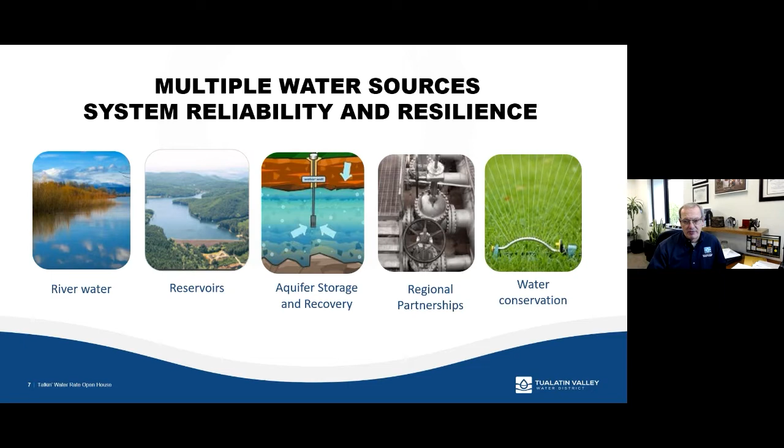So how do we use the ratepayer money that we get, the monthly bills that you pay? What do we do with it? So one of the most significant things that we are currently doing is the construction of the Willamette water supply. You're going to hear that over and over. This has been a multi-decade investment, and it's a big project.

You know, I kind of view this project as we are planting the trees that future generations get to enjoy the shade on. And we had similar people that did that for us, and this is our turn to make this kind of multi-generational investment that looks far into the future and creates a resilient supply for us today and far into the future.

We also spend money on the maintenance and operations of the water system. That's the day-to-day stuff. That's running the pumps that we need to run. It's maintaining the pipes and the valves that we have to do day to day. And when you think about the fact that we have in the neighborhood of about 800 miles of pipe, thousands and thousands of valves in the system, all of that requires maintenance, and we spend money for our staff to maintain that.

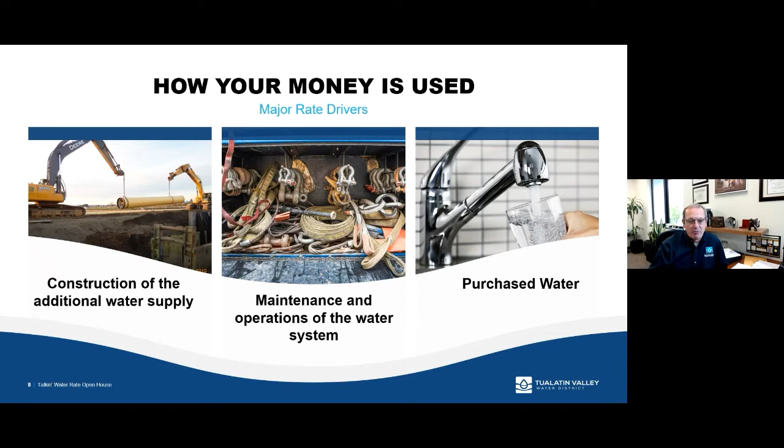And then another significant portion of our budget goes to purchasing bulk water supply, both from Portland and from what I mentioned before, the Joint Water Commission. So we purchase our bulk water supply from those two sources, and that costs us money, and it's where a significant portion of our budget goes to.

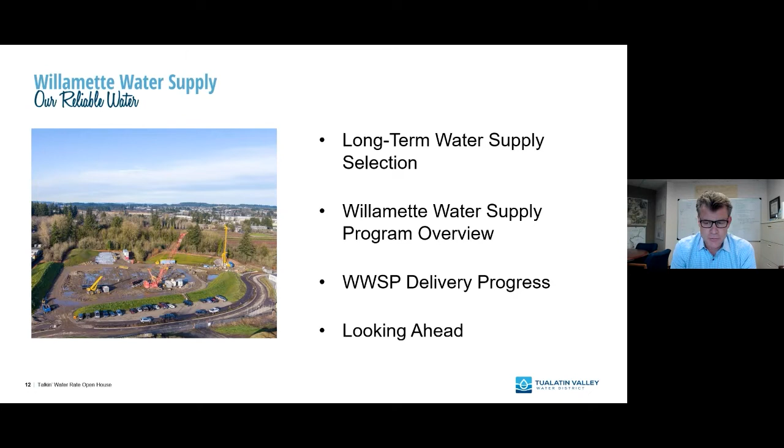So yeah, this is my introduction slide as far as what I do and the priorities, but let's get into the presentation real quick and go into the outline. Four main parts of my presentation: the long-term water supply selection, just how we got to where we are today, the water supply program overview and system overview, the progress we've made, and looking ahead. I'm going to get through my presentation pretty quickly because I want to make sure we get to your questions as soon as we can, and also Paul's got some very important information to present to you on the district finances.

Regarding the long-term water supply selection, this was a decision made back almost 10 years ago, in 2013. TVWD performed an analysis, about a 2-year analysis of the various long-term water supply alternatives available to it. They're indicated here on the right-hand side, starting from the top and going clockwise.

The first option is a new groundwater supply constructed out in Sauvie Island. The second was purchasing water from the City of Portland, which TVWD does now, so it would basically be extending and expanding that supply. The third was the Mid-Willamette River supply, and the fourth is increasing storage at Hagg Lake, expanding supply from the Joint Water Commission.

After detailed technical analysis, financial analysis, environmental impact analysis, and a lot of public input, the Mid-Willamette supply was selected because of lower cost, meaning less impact on rates. It has excellent water quality, provides ownership to the district over its supply, which it does not currently enjoy with the City of Portland. It's also a reliable supply with fewer environmental impacts than all the other options considered.

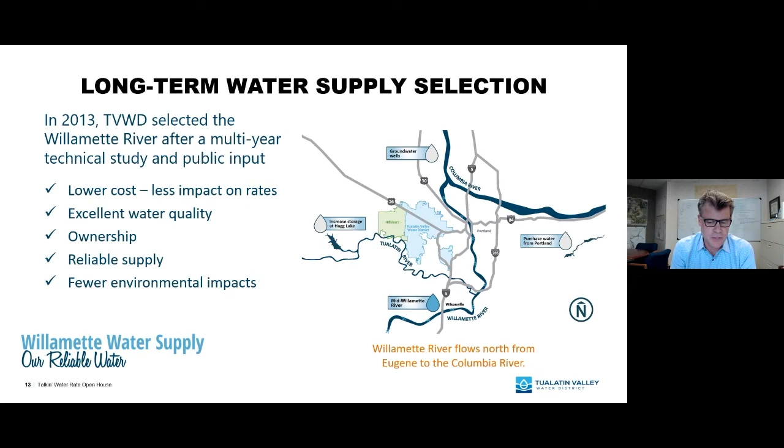I'd like to emphasize that this supply would be replacing the Portland supply. Essentially, the analysis conducted, and I believe it still holds true today, shows that in the long-term costs, the Willamette supply is a lower cost option than staying with the City of Portland.

So what does the system look like at a very high, not very granular, scale? It starts at the south at the Willamette River. There's an existing intake there that we're expanding and improving the seismic resiliency of. We're constructing a new state-of-the-art water treatment plant in Sherwood, more than 30 miles of large diameter transmission main—66-inch welded steel pipe—and water storage tanks. The tanks are planned for the top of Cooper Mountain. There are two of them, but we're only constructing one in this first iteration of the construction effort.

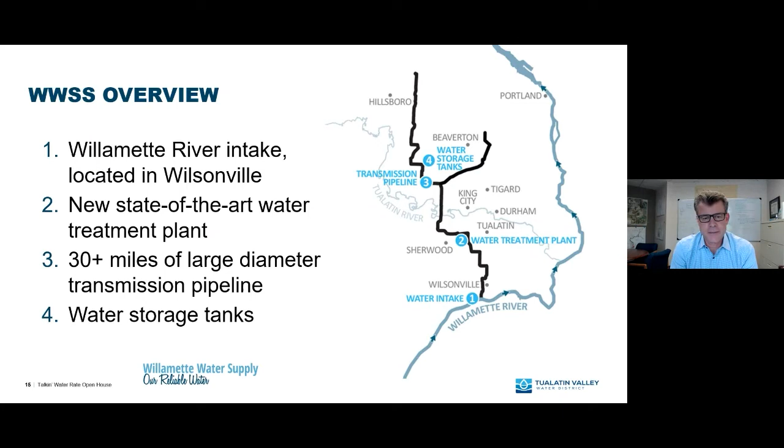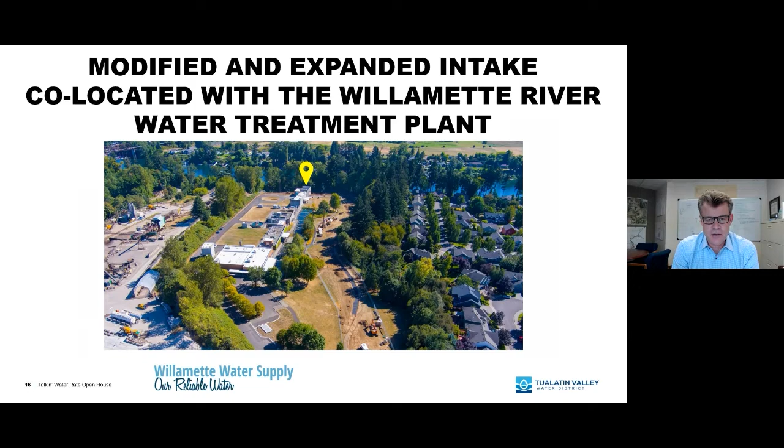I've got some photos to give you a visual image of what each of these elements looks like, starting with an aerial photo of the Willamette River Water Treatment Plant. This is a drone shot looking out towards the Willamette River with the treatment plant in the foreground, down in the city of Wilsonville. The flag marks the raw water pump station, or raw water intake. In the aerial view, you'll see a dashed outline extending into the Willamette River, highlighting where the intake screens are located underwater. There's a pipeline connecting to the raw water facility on the bank of the river—that's where we get the water from.

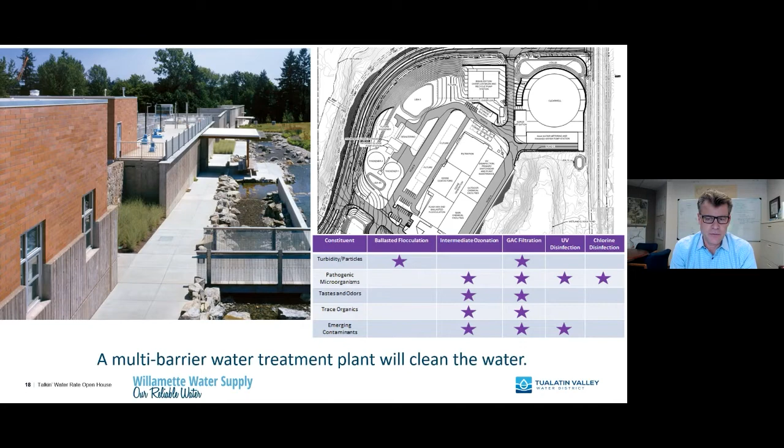A lot of pipeline that we're installing, we have installed. We've completed about 7 pipeline projects to date, of a total of about 18 separate pipeline projects, about 30 miles or more than 30 miles.

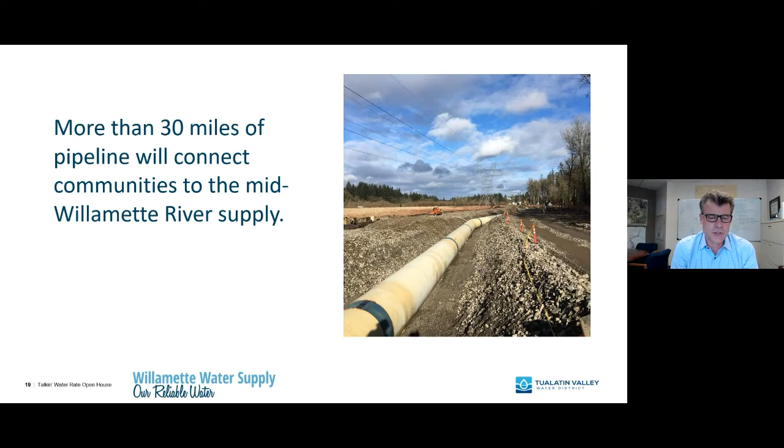And our pipeline projects look something like this. You've probably seen our work. I've got some more photos coming up here in a little bit. And then one more slide to show you what all these elements look like is this one that shows what our reservoirs will look like when they're constructed.

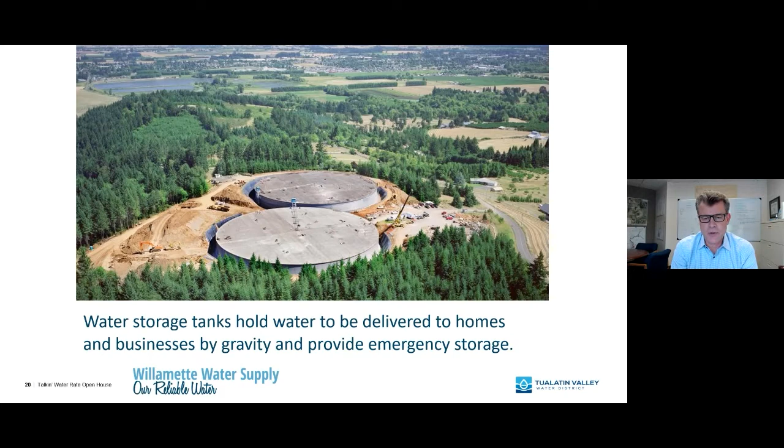Again, we'll only be building one in the first effort. This photo is actually an aerial of the Fernhill Reservoirs, which is part of the Joint Water Commission system out there in Forest Grove. So this is what these tanks will look like, and they hold water to balance our transmission system operations and also to supply water during emergencies or brief shutdowns.

So let's talk about the progress that we've made to date on the Willamette Water Supply Program. To date, we have completed 7 pipeline projects.

We've secured WIFIA loans, which I'll leave for Paul to explain the benefits that provides to the ratepayers. We've received our federal permit for the construction of all of our facilities, completed all of our planning and design for all of our projects. At the end of this year, we'll be advancing all 15 remaining construction projects on the program and continuing our successful partnerships that help us get our work done and also help us manage costs and public impacts on our projects.

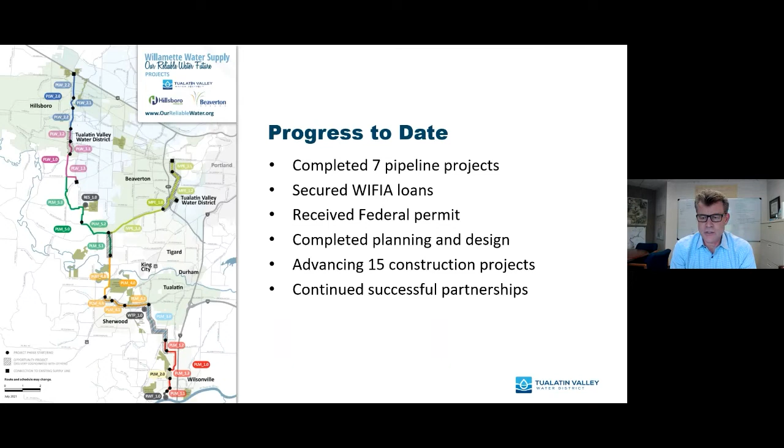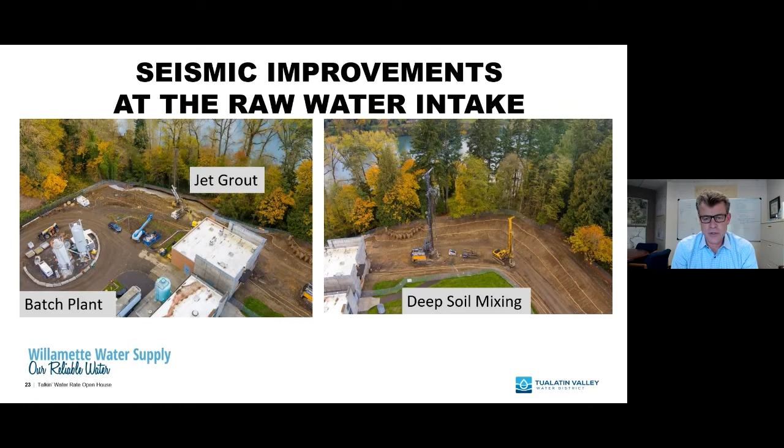But this one in particular, this photo is the pipeline we installed next to Tile Flat Road, where we had to get our pipeline in and out of there and be done with our construction before the development occurred in that South Beaverton area.

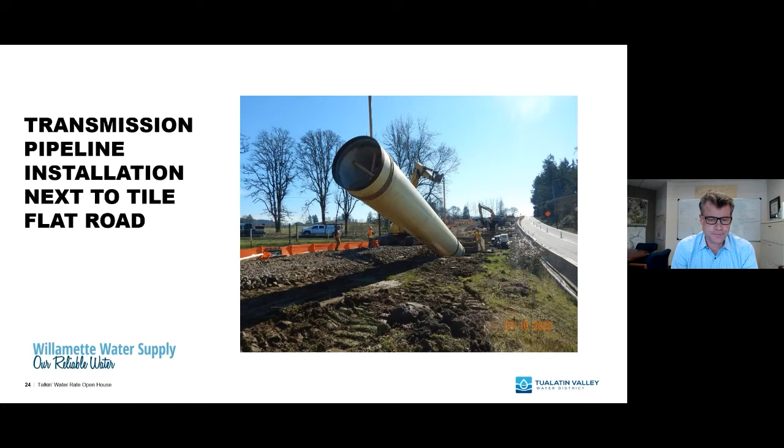We also do a lot of work at night. We're working in some very busy areas. Like right now we're working - sorry, my phone is ringing. I'm gonna press ignore on that.

We're doing work in and around the intersection of Hall Boulevard and Scholls Ferry Road. If you're in that part of town around Washington Square, all of that work is being conducted at night because that area is so busy with traffic. The photo here is actually at 209th and Farmington, where we got permission from Washington County to close that road and get this construction done at night, which was found to be the safest, most economical, and quickest way to do that work with the least impact on the community.

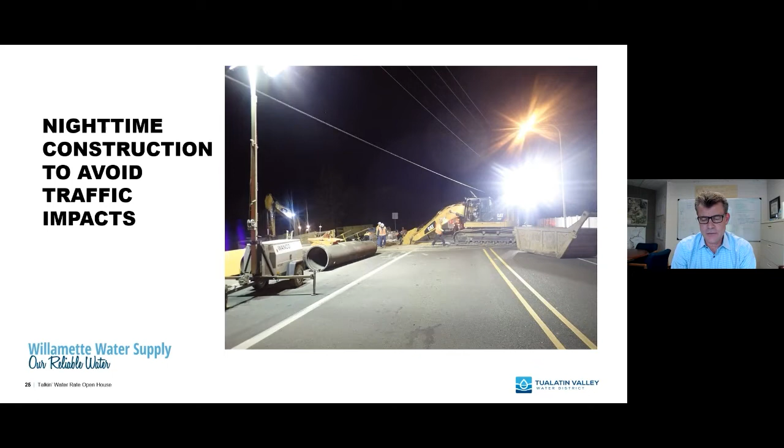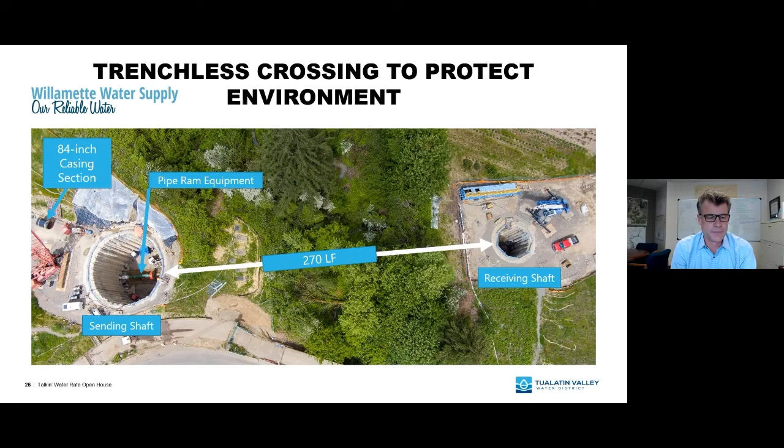One last thing to speak about is what's been the regional economic benefit from the program. So far, 91% of the spend on the program has been to local businesses, material suppliers, goods and services, and that means more than $300 million has stayed local. The balance, about another 4%, has gone to areas outside the local area but still within Washington and Oregon, and about another 5% outside of that area.

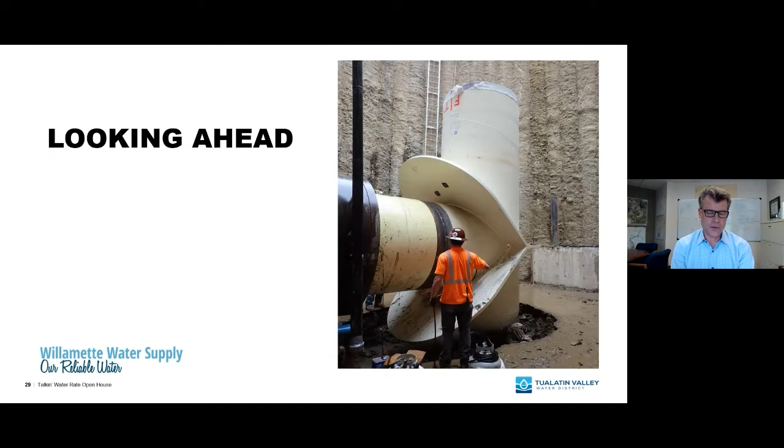Looking ahead to this fiscal year and going forward, we have a lot of work happening. Now that we've completed all of our planning and design, by the end of this year we'll have 15 construction projects all happening simultaneously. It's going to be a very busy period for us from a construction standpoint. We still have a lot of program management to complete, continued acquisitions, some real estate permits and other procurements, and a lot of planning still to be done.

When we're complete with the program, we have to make sure we have water supply integration figured out in terms of delivering this new supply into the existing distribution systems, and along with that, commissioning and startup of the whole water supply system, and planning for long-term operations once the system is operational. We need to make sure we have all of that figured out well in advance of actually turning the system on.

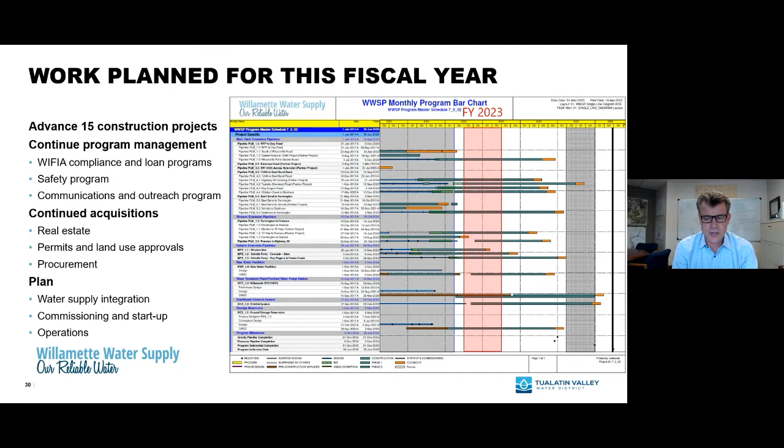Tom already alluded to this, but I want to put a finer point on where these cost increases came from. At the end of last year, end of 2021, we were bidding the remaining work on the program so we could get into this major construction period. Toward the end of 2021, we had two of our largest packages to bid: the Reservoir and Pipeline Project and the Water Treatment Plant Project.

In developing the estimates we used for our financial planning, we had a lot of technical experts, industry professionals, and even contractors helping with our budgeting for those projects. On the Reservoir and Pipeline Project, we had an estimated cost of $117 million, again with all of those professionals helping us come up with that number. When we actually finished competitively bidding that work out on the market, the bid price came back at $143 million, and that was actually the low bid price. So that was the cost of that project at that time.

Worse was the water treatment plant, which we were bidding around the same time, beginning in the fall of 2021. Again, we had an estimated cost, with a lot of effort put into it, of $292 million. The bid price came back at $427 million. This was quite a surprise to all of our professionals working on this. We did a deep dive to understand the drivers of these cost impacts - are they real, are they fair, is this really a true representation of where we are in this market? We found that it is.

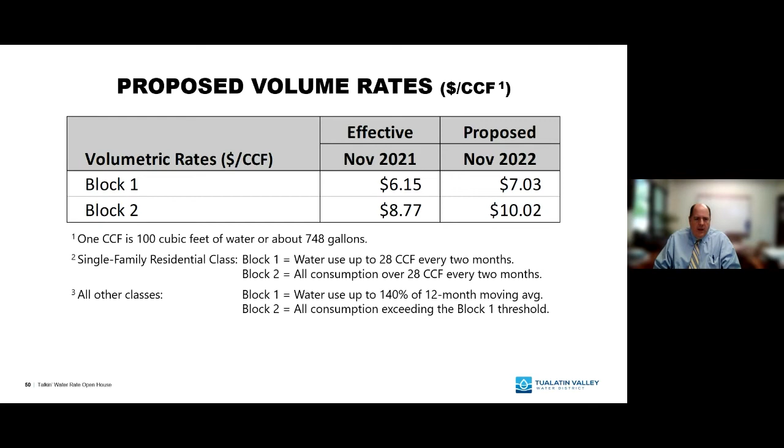That's going up by $13.21. And then for a high-use customer, a very high-use residential customer, this is almost 21,000 gallons of water, or over 87 tons of water. We're looking at an increase of about $32.47 per month.

With that, I'm going to turn it over to Tom Hickman to make some closing remarks.

Thank you, Paul, and thank you to everyone again who's attending and being patient as we go through this. Real quickly, can you go to the next slide, Paul? We've been doing our best to manage these impacts. We were successful, as the WWSS, the Willamette Water Supply System, in getting a $1 million grant through the House appropriations in 2021 for the treatment plant. And then again, just a few weeks ago, we got an additional $3 million through Representative Bonamici through the House appropriations.